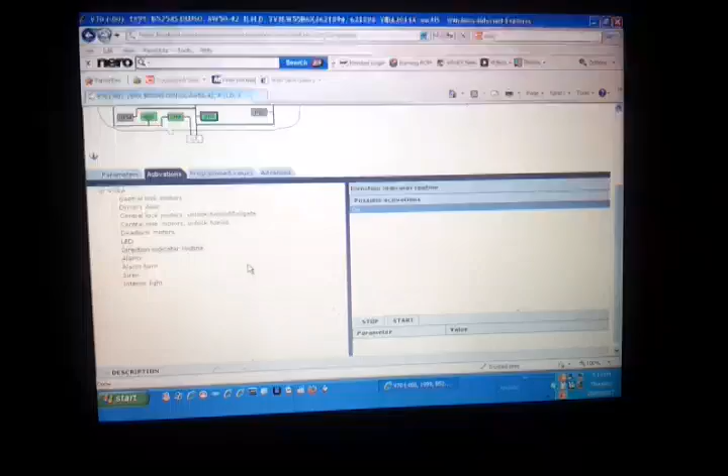Oh, hey guys, it's Mike here, and I'm just looking at the diagnostic system called Vida, which is built for Volvo cars, and I've got it loaded onto my laptop now. I'm looking at some interesting things you can do with VGLA or VGL.

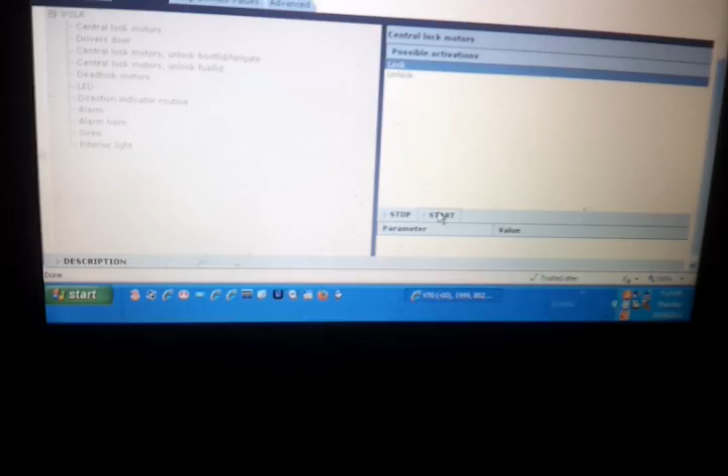Stuff like, if I click on central lock motors and I choose lock, and then I go down and press start, my central lock's just activated. And then if I choose unlock, choose unlock and then start, whatever you do here, you've got to press stop after you do it, so then you can get your display back. See how your display greys out? You can't do anything else until you press stop.

So for example, if I wanted to check my central locking motor, or just my driver's door motor, I press driver's door, then I highlight lock, and then I press start. It's supposed to have locked. Maybe it's already locked, I'll just check. Yeah, not too sure about that. It didn't really work.

Now this is an interesting one, the LED that's up on the dash. I've never seen it light up on this car, but watch now. And there she blows. Because I asked it to blow.

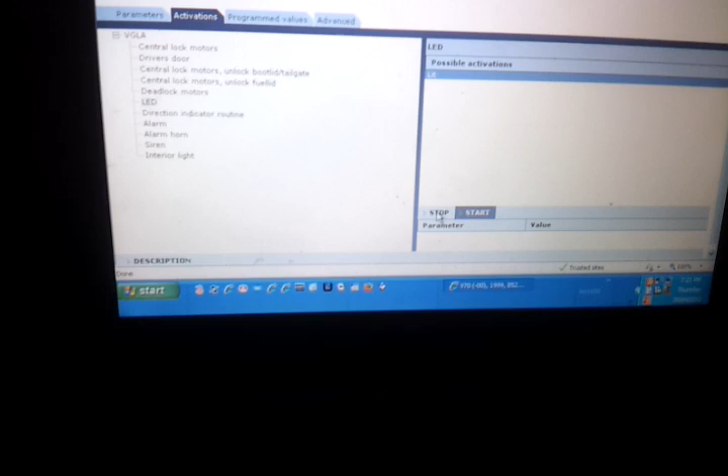One of the things I'm not sure about is whether my car actually has an alarm system. I have no idea. I wasn't given any remotes with the car. I'm kind of guessing that this car was supplied with a factory alarm. I don't know.

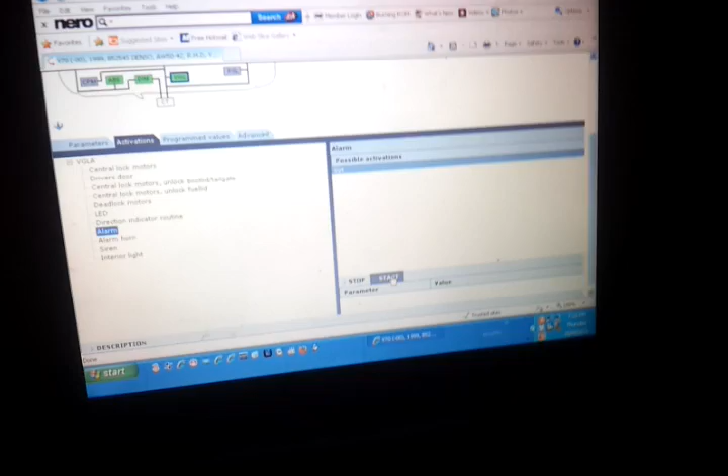I'm doing the direction indicator routine now. Okay, so I've just pressed start and my indicators are on, like it's going through an alarm activation routine. I press stop and they turn off. Now I've pressed alarm, possible activation is set, but all these tests oddly don't seem to work unless the ignition's on.

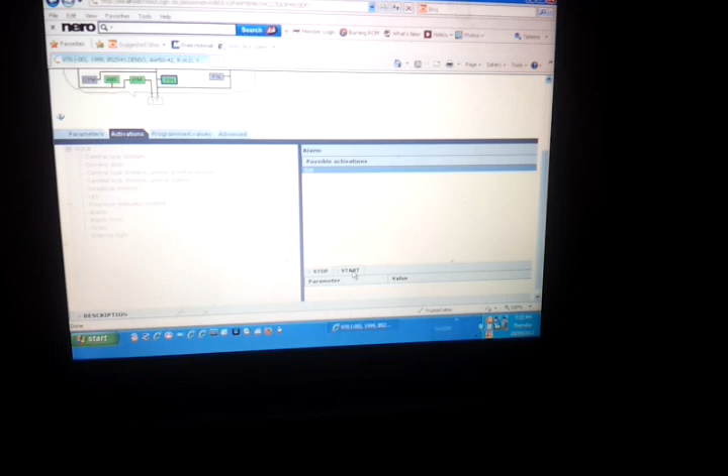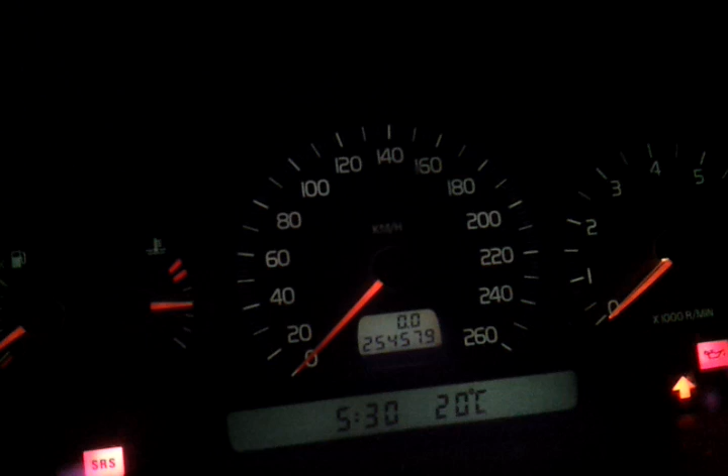I mean, one of the ways I could tell is if the alarm was on and it had an immobilizer, I shouldn't be able to start the car. That starts fine. Oh, hello. Hang on. Aha!

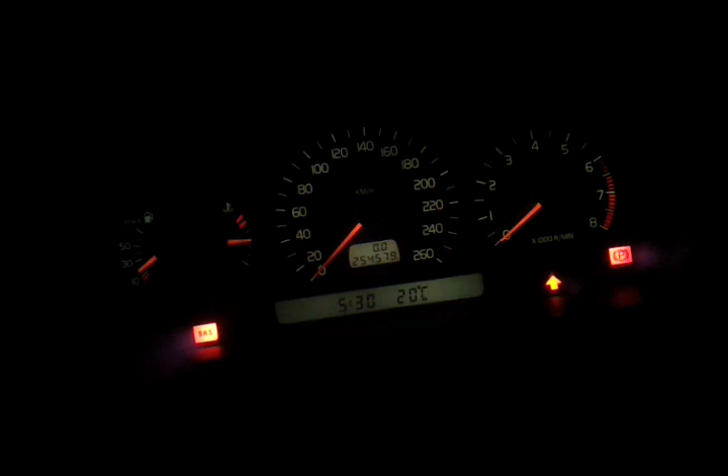Well, I just found something out that's really cool. I just turned it off. And I've still got... Oh geez, what have I done? I think I've activated... Okay. Well, I did something there. I activated some sort of ignition killing immobilized state. Oh man.

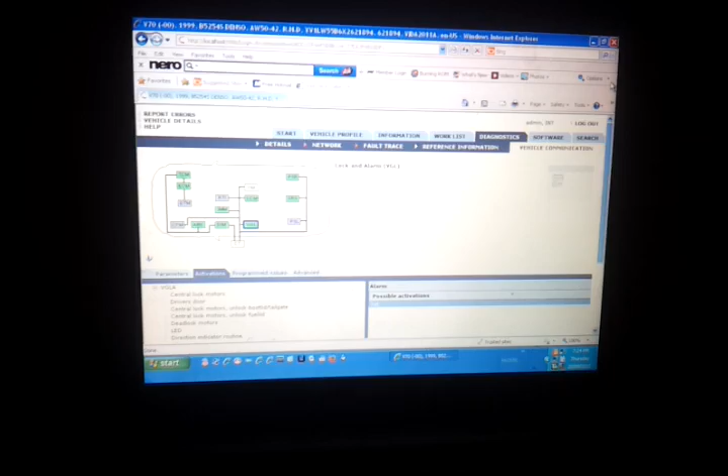Yeah. Well, this has been really cool. Next up, I'm looking at so this is a 99 model with a 4-speed. I'm looking at the TCM and just looking at parameters.

Okay, so I can have a look and see what position the PNP thinks the lever is in. Now this is great for if you fit a new PNP switch and you're calibrating it. Your value is P and the lever's in P. I can't show you that because my console bulb is blown, so that's something I have to do. Just going to remove that from the list.

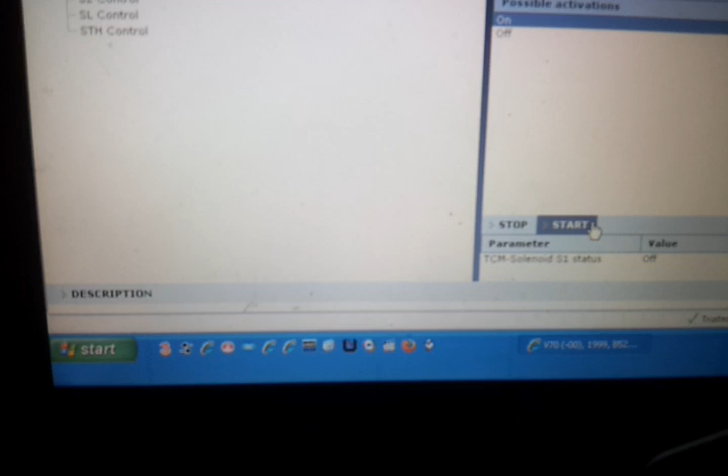And the other thing which I found was really cool, under Activations tab, is you can actually turn on your solenoids. I'm kind of assuming that I'm going to have the ignition off for this. I'm not going to be operating any solenoids with the engine running. I can't hear anything.

Let's see. Okay, it says TCM solenoid 1 status off. Possible activation on. Start. No. Okay, so we'll do this with the ignition on.

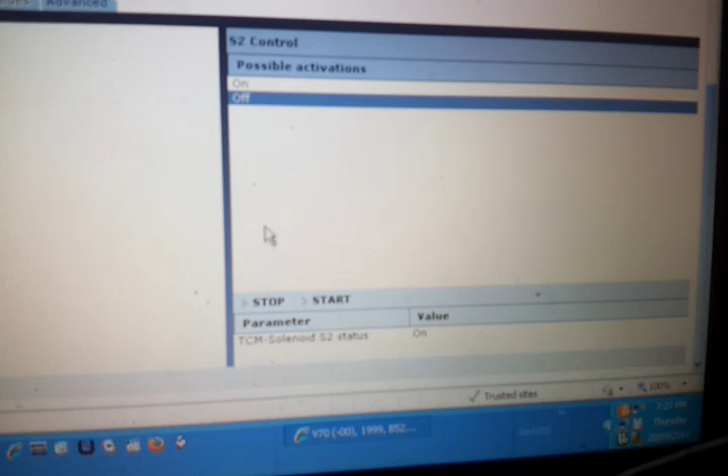Okay. Well, it's changing its state from on to off. We'll do the same with S2. Status is now on. So let's turn it up. Oh, sorry. Let's activate it to off. Okay. And let's see if the status changes. Yeah, it sure does.

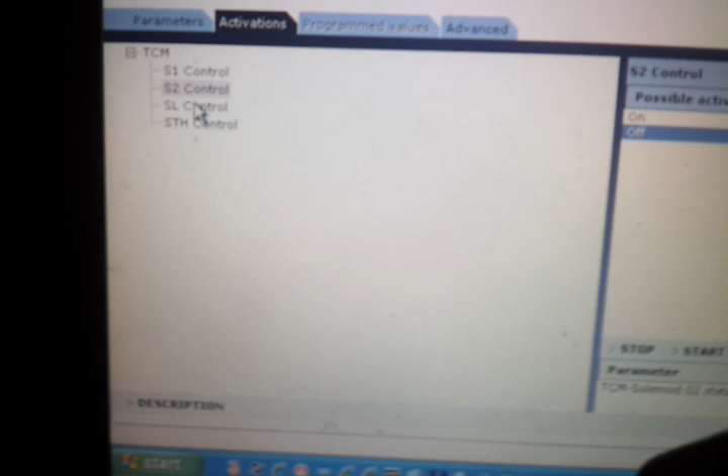So this is a way for people to test their solenoids if they're having gearbox problems with Vida. Now this is the lock-up solenoid control. Current status is off.

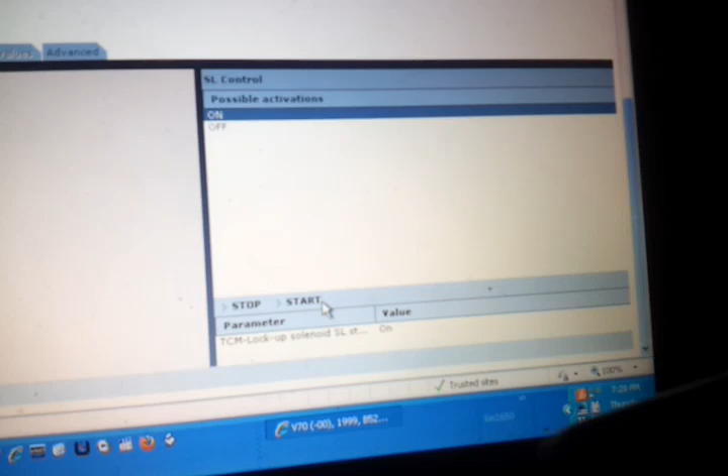Now, just because it changes to an on state, it doesn't mean the solenoid's working. I think what it's telling you is that the voltage is being applied. It doesn't know what position the solenoid is in because the solenoid doesn't have position sensors.

Okay, and there's some other stuff here in the Advanced tab. I wanted to just go through it.

Okay, I didn't know this. The 4 speeds, according to this - I've programmed in AW50-42 - has got a resetting transmission oil replacement counter. It's asking me which engine number I have. Do I have any of those? Well, that's a no, I don't have a B5202. They're all 10-valve versions, so I don't have those.

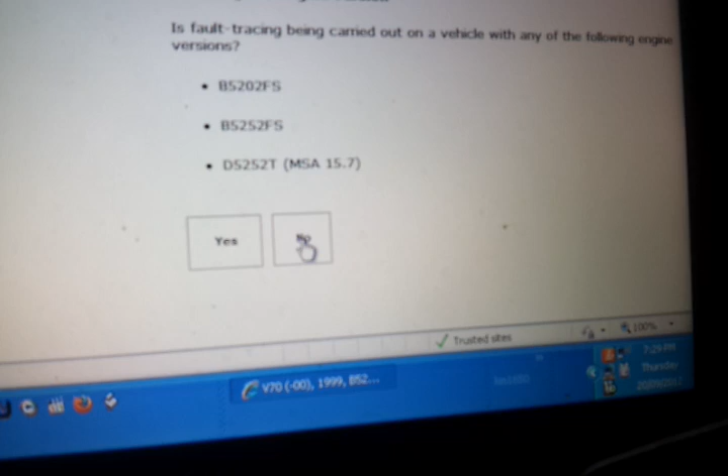And then it's telling me to turn my ignition on, connect my VCT 2000, which this is not, and I'm going to press continue because I have just put new fluid in recently.

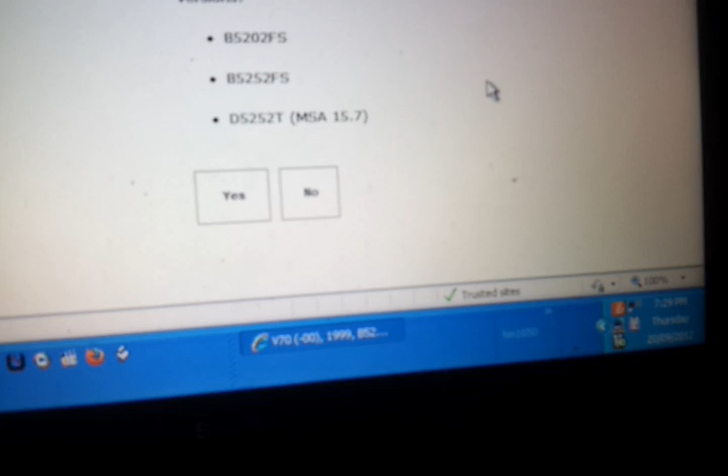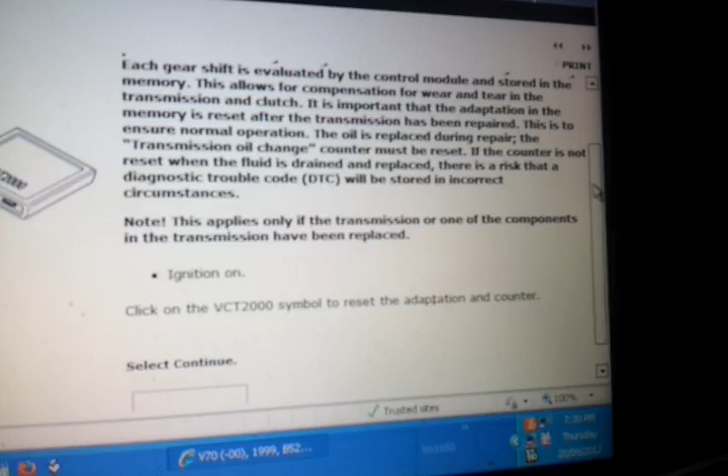And get this too, we've got a resetting the adaptation. I didn't know you could do this on a 4-speed. Apparently with the 4 speeds you do it by just disconnecting one battery terminal and touching them together, and you basically get yourself a reset.

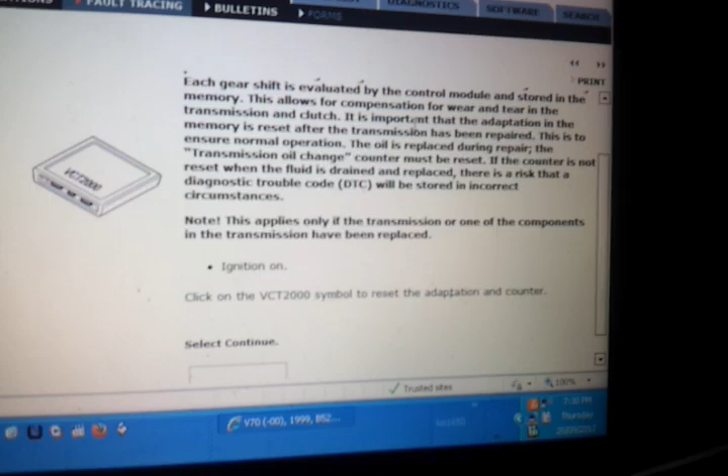But it says here each gear shift is evaluated by the control module and stored in the memory. This allows for compensation for wear and tear in the transmission and clutch. It is important that the adaptation in the memory is reset after the transmission has been repaired, to ensure normal operation.

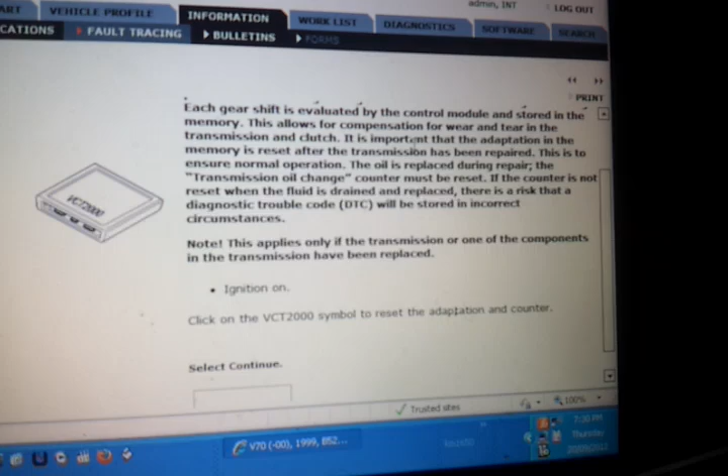The oil is replaced during repair, the transmission oil change counter must be reset. If the counter is not reset when the fluid is drained and replaced, there is a risk that a DTC will be stored in incorrect circumstances. Note this applies only if the transmission or one of the components in the transmission have been replaced.

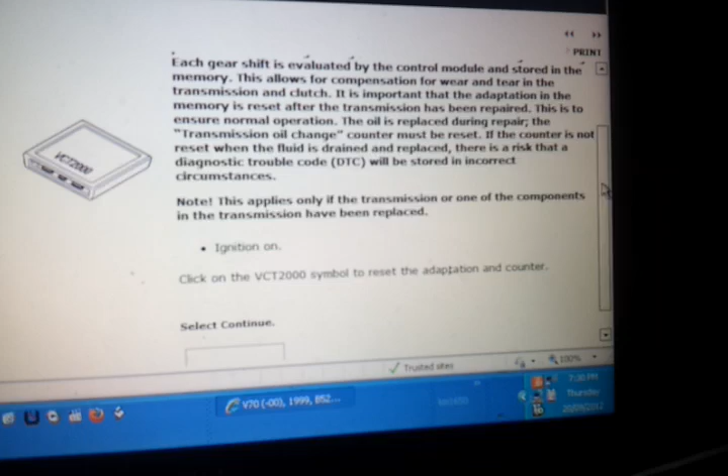Well, no, I haven't replaced anything in my transmission, so I'm not going to do that. But I have changed the oil, so I've done the oil.

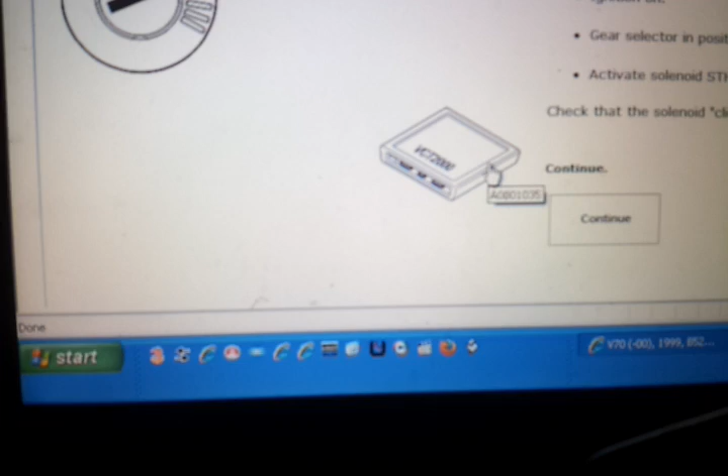Now there's another one here called activating line pressure solenoid. Why I would do that, I don't know. I don't know what that means, and it's taking me to another window. But yeah, as you can see, there's some really amazing stuff here.

If I go through fault trace, for example, I can look at the state of my car back on the 9th of the 6th, 2012. This is when we had a bunch of error codes. I don't know which of those is still with us.

I believe the only one with us is the PSR 424, which is about number 7 down. That one is still with us because I put an 850 power seat module in, and it seems to think that it's not the right one. Well, that's fair enough, it isn't, and it's reporting correctly.

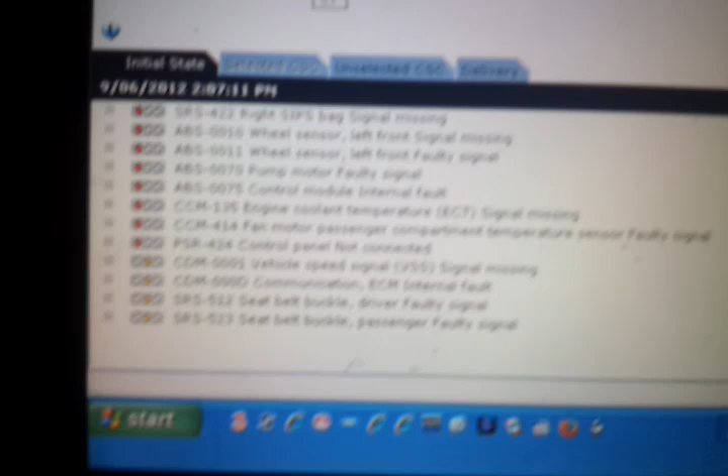Something about the fan motor passenger compartment temperature sensor signal faulty - yeah, I don't know about that. That seems to be okay now because it's not in the delivery tab.

We did have ABS problems with this one, I think, if I'm not mistaken. Yeah, I got a unit from Matty Moo, and we put it in this car, and it's sorted out the ABS front left faulty signal and front left signal missing.

ABS pump motor faulty signal, we got rid of the control module internal fault signal - they're all gone. SRS, we sorted that out.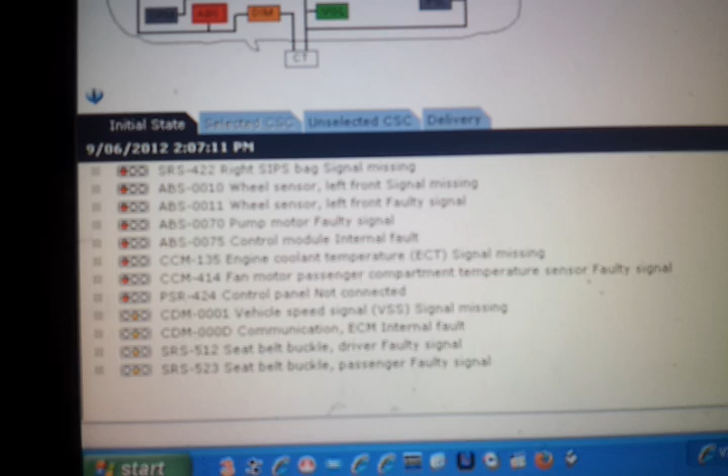By fitting a resistor across the connector going to the seat. We were not using a 99 model seat, we're using a 96 model seat, so I had to deal with the connector that went to the airbag, and I put a couple of resistors equaling about 3 ohms across it.

What else do we have? These belt buckle ones I think are gone now. I don't know what that means, maybe they had some corroded connections or something. They seem to be all gone.

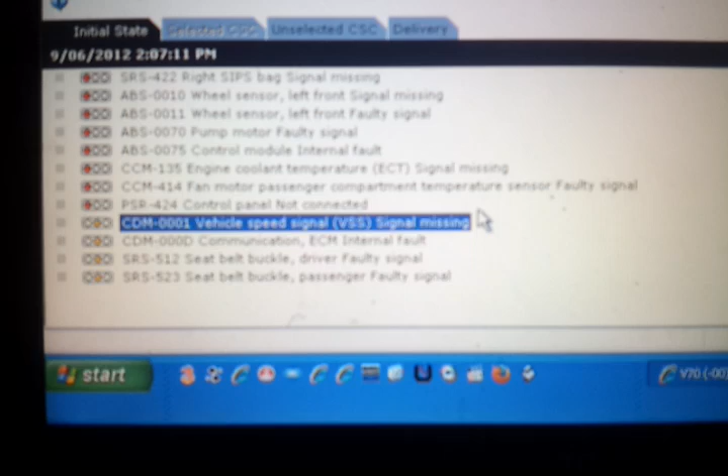Vehicle speed sensor, we had this - this is a 96 gearbox fitted to a 99 car. What I failed to do is put the 99 speed sensor back into my 96 gearbox. They're a different sensor, and it was looking for the particular impedance of, or particular signal that a 99 signal gives. So that's all sorted out.

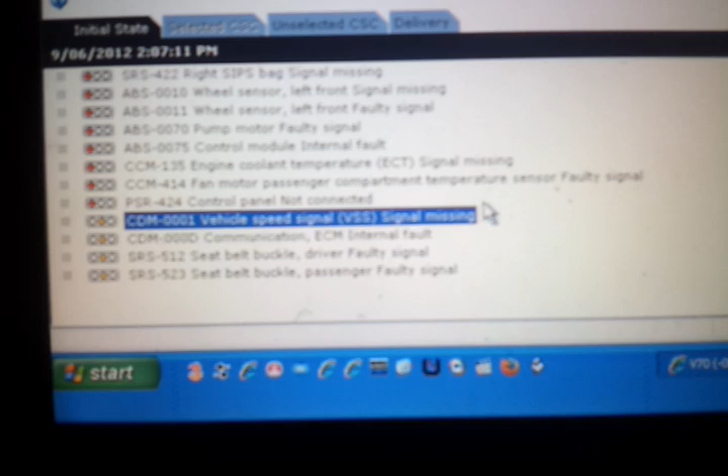ECM, yeah, that's gone, don't have that anymore. So if we look at delivery, this tells us the current state of the car.

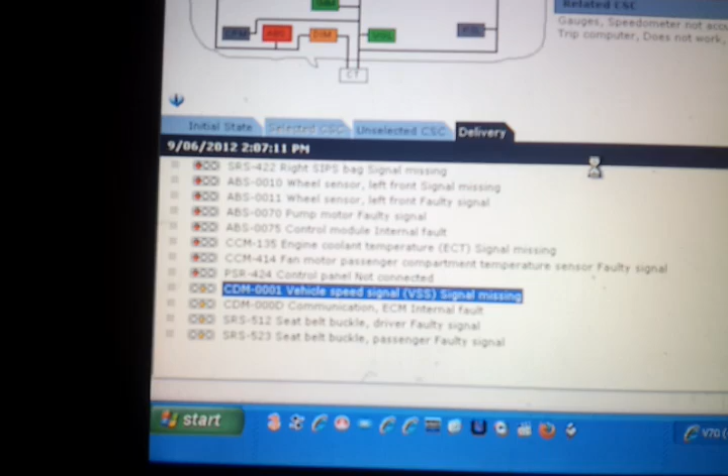Vida's a bit slow. I haven't got the recommended 2 gig on my laptop, I've got 1.5 gig of RAM. It is, I think, a dual core, like a 1.4 or something. No, it's a 1.8.

Okay, we've got an immobilizer communication, faulty communication. I've never had that before. ECM 720A. Possibly when I just did that little trick with the alarm, putting it in alarm mode. I don't know if that's really a problem.

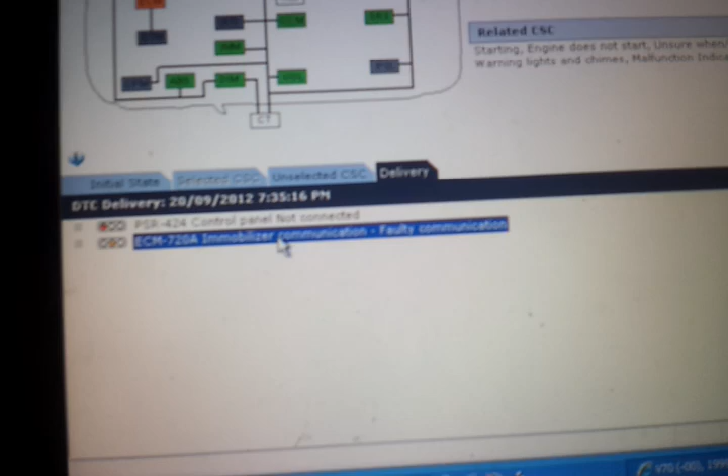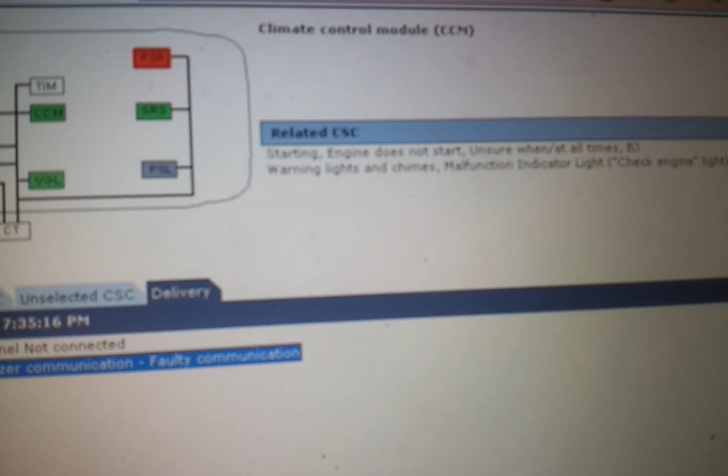So it's there, it starts, and it explains to me what actually happened. Engine does not start, when you've got an immobilizer problem. And that's true, the engine didn't start. Problems with the power, it doesn't explain the power seat control panel not connected, doesn't really tell me anything about that. It's looking for a power seat module because I have the power seat fuse in, and it's looking for the correct power seat fuse.

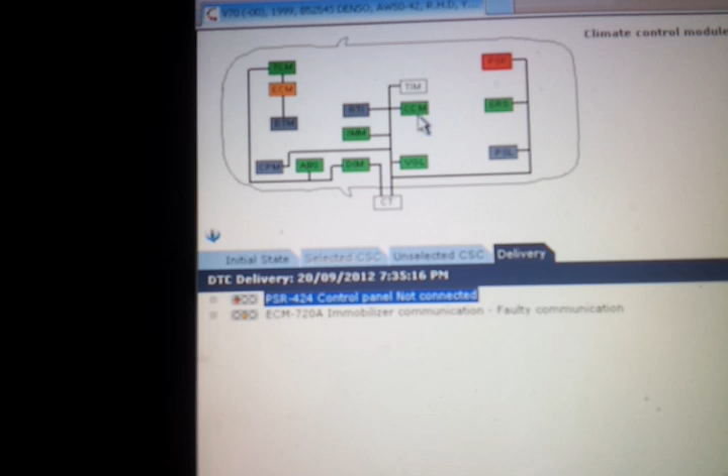Climate control module's interesting.

Yeah, I'm coming in soon. Yeah, I know you do. I'm just doing a video, and I won't be long.

Combustion. Okay, no, we haven't got a CPM combustion preheater module, so we're not going to do that one.

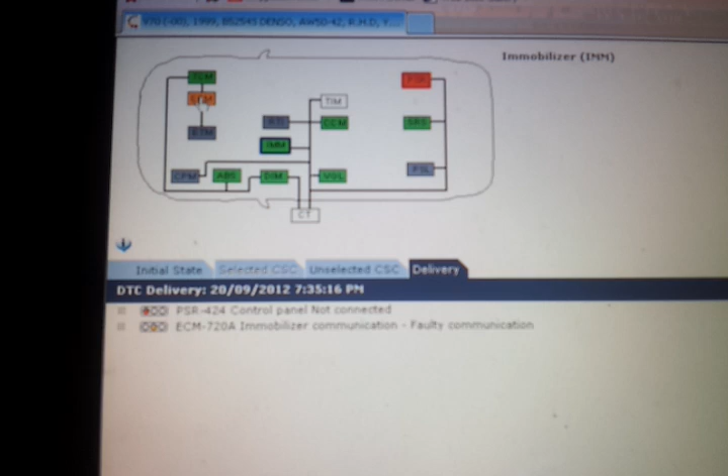IMM, yeah, it's the alarm. Well, look, I'm gonna cut it short. The ECM's an interesting one too. The ECM is communication. I think, yeah, here we go. ECM.

Oh, okay, it's raining. I better shut the windows. It's been a warm day, and it's really uncomfortable here in Melbourne because we had a warm, sticky day and now it's raining, and I've got mosquitoes here in this car with me that have just started to bite my back. So I think I will go inside.

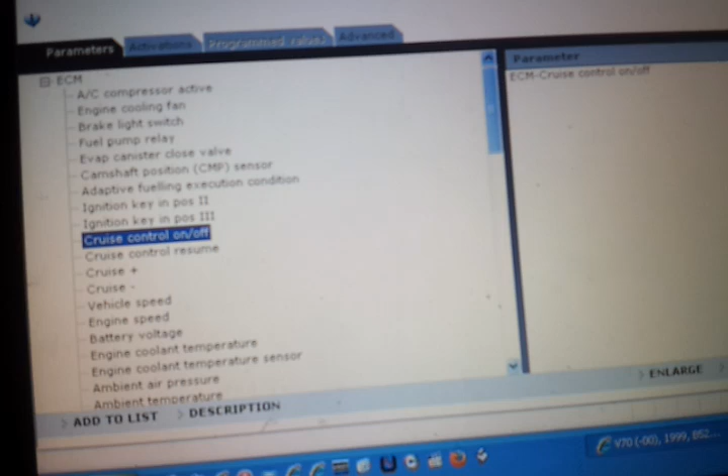On the ECM, this is really cool. We've got... wow, this is really interesting. It says here I haven't got cruise control fitted to this car, but I have got a cruise control switch fitted, and just by flicking the switch on and off, it's telling me what state the switch is in. This system's really smart.

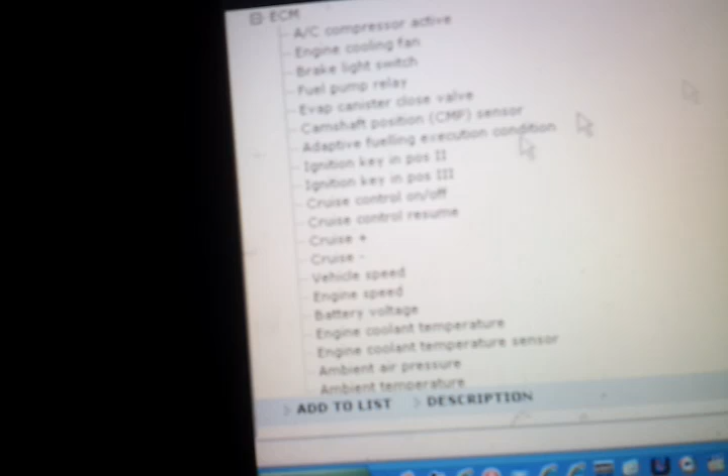Cruise control resume. What state is that? That's off. Yeah, I'm just flicking it up to resume. So that's testing my switch.

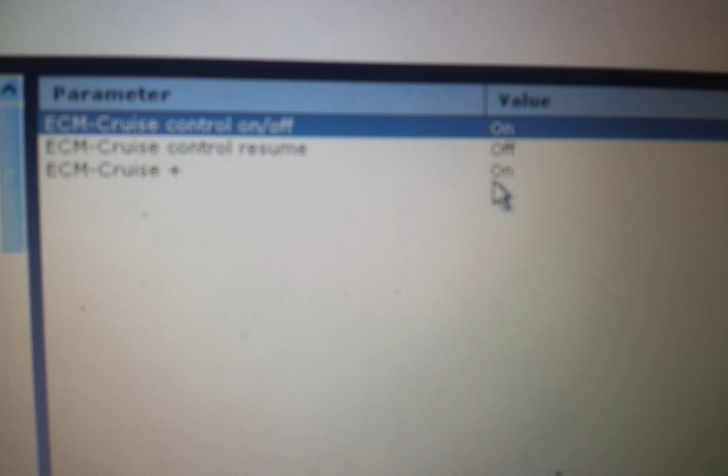Cruise Plus, so this is checking my Cruise Plus contact. I'm just going to flick it on, get that mouse out of the way. On. Yep, so now the contact's okay. I'm going to check my cruise minus. Yep, that was on. Yeah, that's working, so I know that all the contacts in my switch are fine.

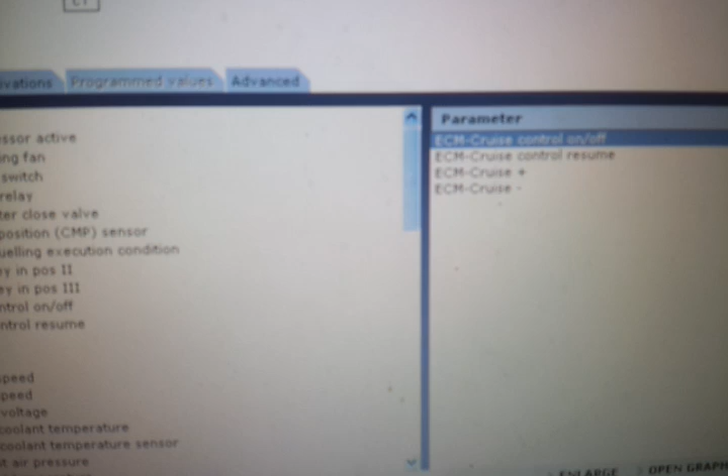You know, these systems are just amazing. You couldn't do this with an OBD2, just a diagnostic unit. Without Vida, you're pretty much, you know, you've got to take items out. Like if the cruise control switch was suspect, you'd have to take it out, test it, see if it's okay, run some contact tests with a meter. I mean, look at this, it's just unbelievable. And the beauty of this...

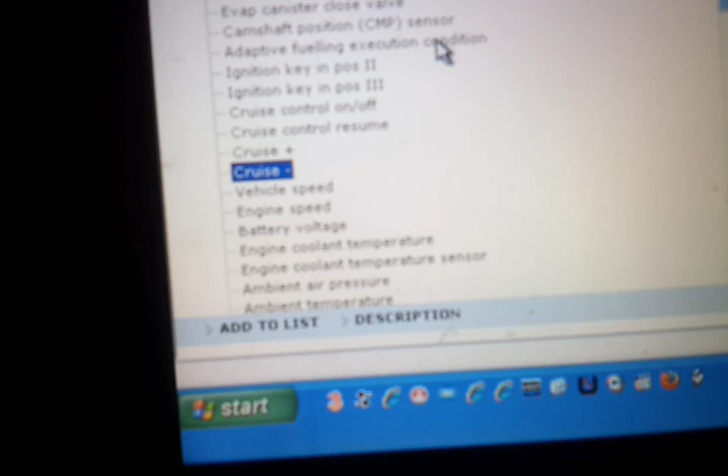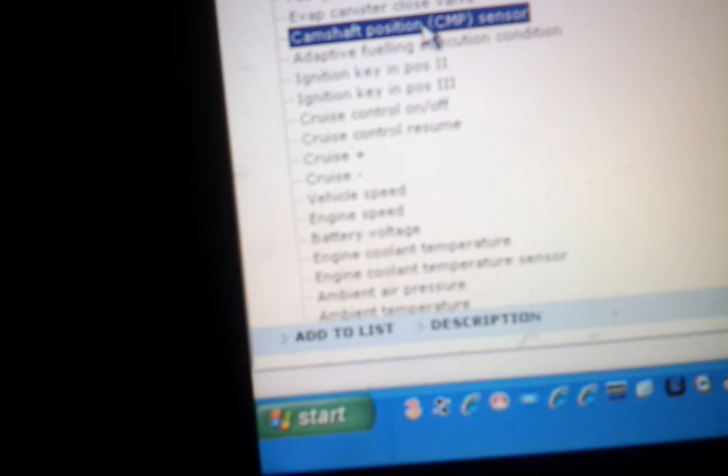This is adaptive fueling execution condition. What? Now, what's the state of that? Not executed. What on earth is that? Camshaft position sensor. What position is that in? High.

If I turn the motor over slightly, it's still high. Still high. Still high.

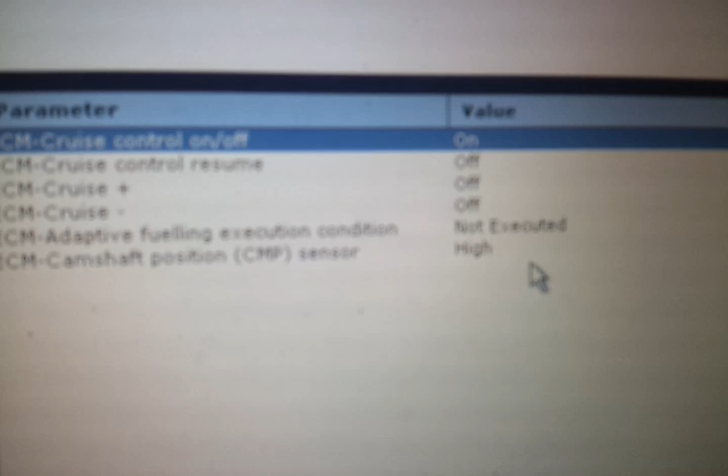Let's see if we can get it into a low state, which means the little flag is... oh, hang on. This is a 99, so it doesn't use... gee, these are a bit different. Yeah, these are a little bit different. This is not the traditional camshaft sensor. This is a Denso system, so it's got a very different camshaft sensor. We're not going to get it to go into a low state, I think.

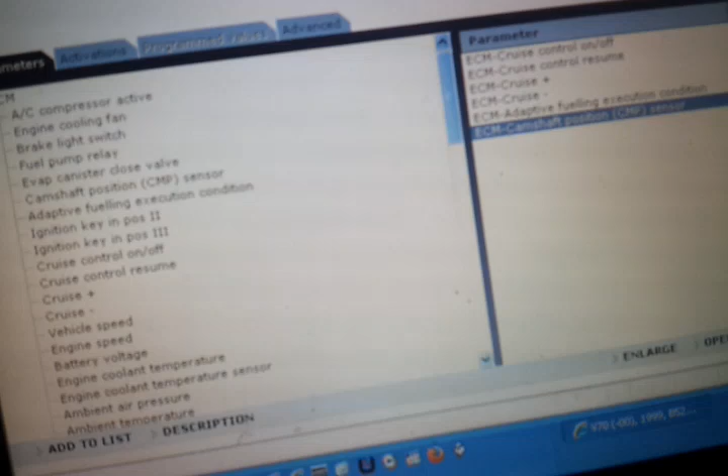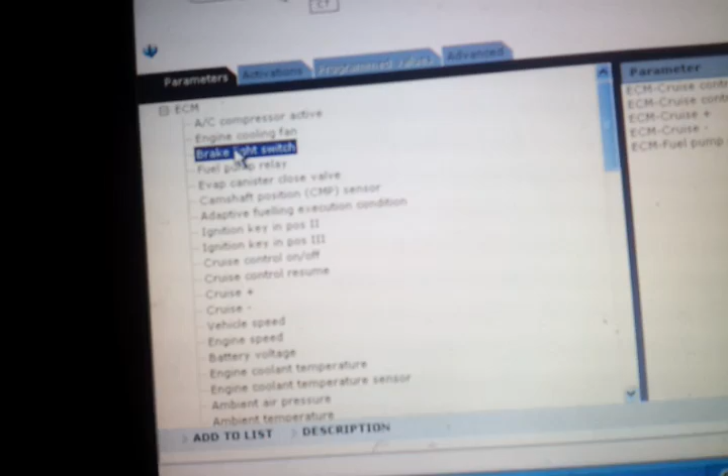Just going to remove some of this stuff. Oh man, these mozzies have really got me. Fuel pump relay. Okay, what does that mean? Off. Okay, so I'll toggle the ignition. Probably was on, but they turn off after 1 second, it probably wasn't quick enough to catch it. I can test my brake light switch. Yeah, that's a good one.

Just pressing my brake pedal now. Brake light switch is on. Brake light switch is off.

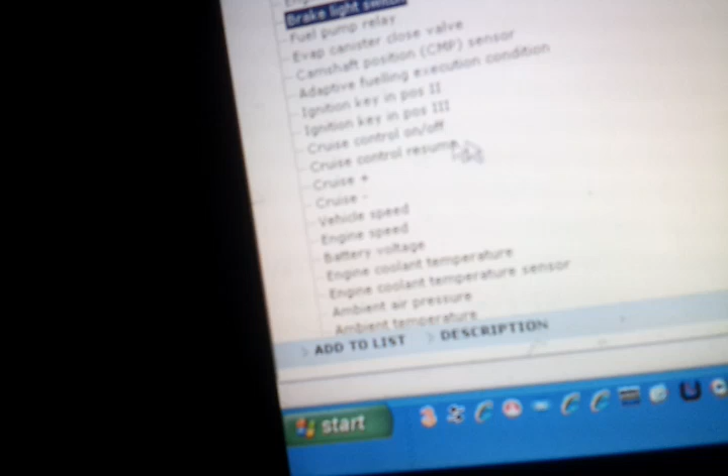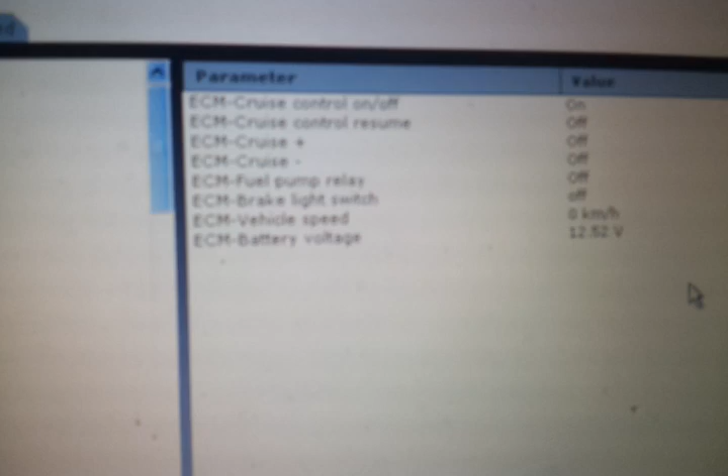We can put all sorts of things in, like vehicle speed and battery voltage. This is a good one. You want to know what your battery voltage is. We don't need a multimeter when we've got battery voltage. Let me just have a look at that. Yeah, 12.5, it's looking okay.

All sorts of stuff here. Yeah, brake pedal position, accelerator, PWM. Now this is useful for if we're trying to fault find our ETM, we're getting all sorts of codes. Now it says 8%, my foot's not on it. Now it is. It's about two-thirds now. It should be reading... yep, 53. Flat to the floor.

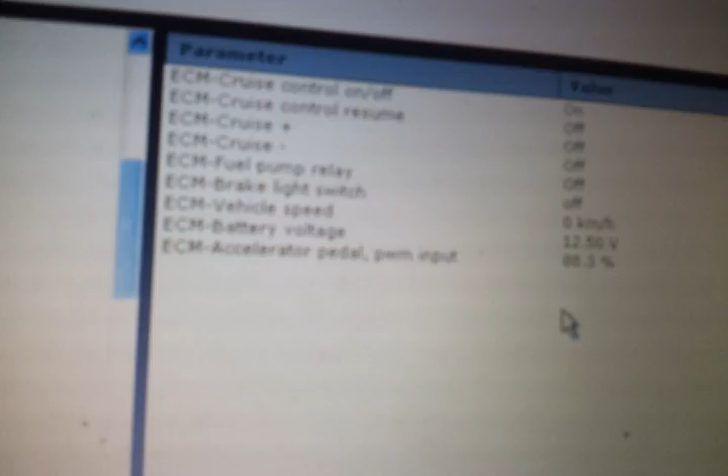And it should come up with, I don't know, 100%? 87. Hey, I want this to go 100%. Where's my 100% throttle? I've only got 88. Does that mean it's only going to go 88% as quick as it can? Oh well.

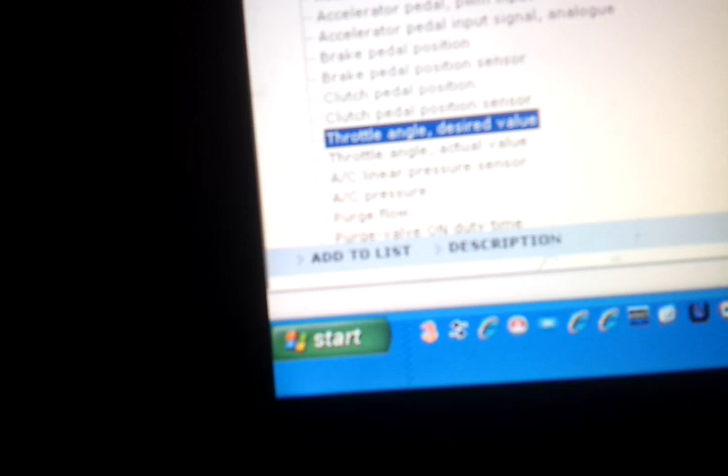Throttle angle, desired value. This is interesting. I'm going to have a look at this as well. Now this is more to do with our ETM. I've got ignition on. 3.43%. 34%, interesting. Okay, throttle angle desired value, and you compare that to the actual value.

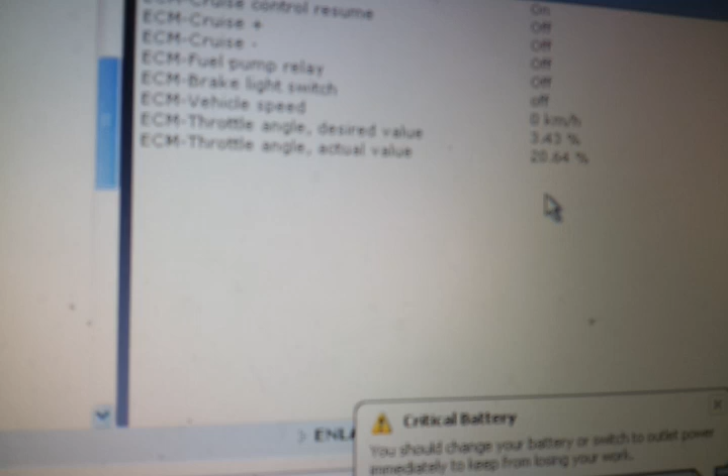Now this is interesting. It should be, wow. Shouldn't desired and actual be equal? I'm just going to press it. Okay, I know why. Because these ETMs actually disengage. It takes about 12 seconds for this ETM to reset itself.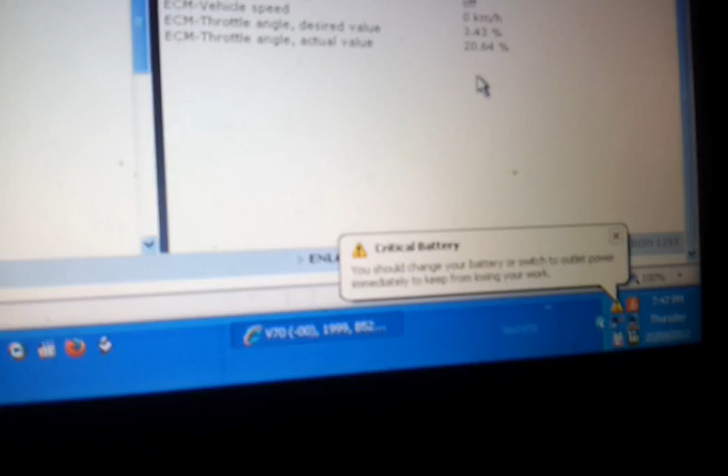No, it hasn't. Oh. I'm getting a problem with my power here. I hope I don't lose this. Anyway, you don't want to... yeah, I'm not going to bother about that.

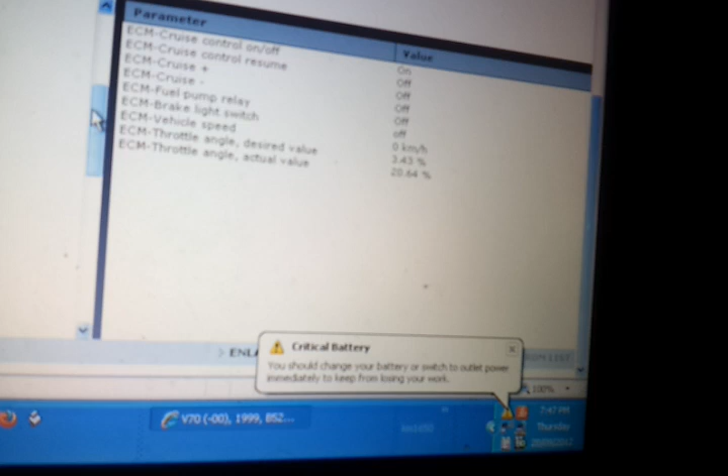Absolute, yeah okay, so we can look at our mass airflow sensor while the engine's running. That's something I would like to have a look at. I know nothing about mass airflow sensors. I know that when you're idling, something about it being around the 5 mark. So in, what's G per second? Well let's have a look. Zero at the moment.

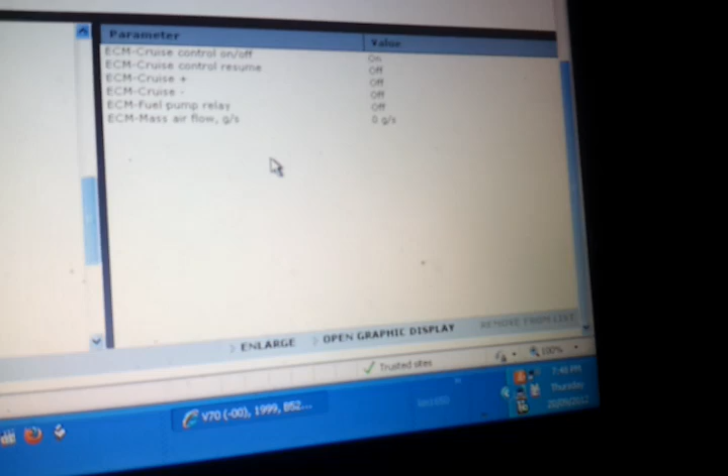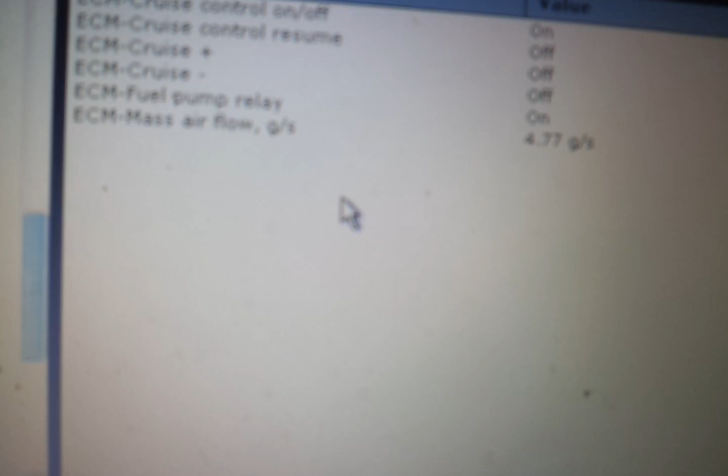Let's have a look. Oh, come on. Okay, yep, okay so we got about 4.77. Apparently that's ideal for idling. Look at the revs up at about 2,500, we're reading 10.98. I have no idea if that's correct.

Misfire counter 1. We did have a misfire on this car, on cylinder 1. But I think it's all been reset with the battery being disconnected and made flat.

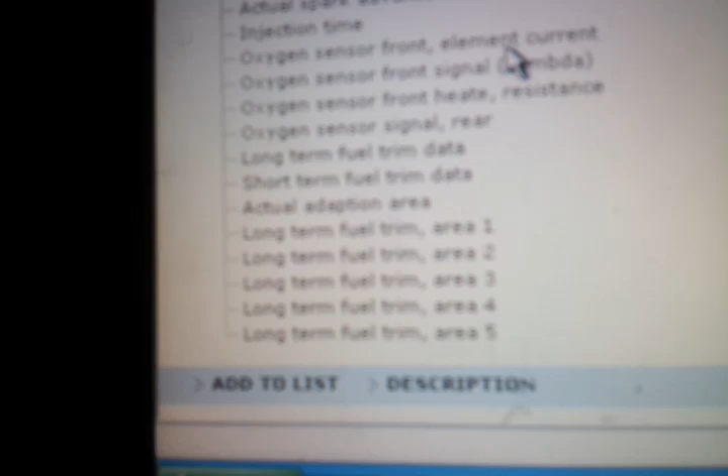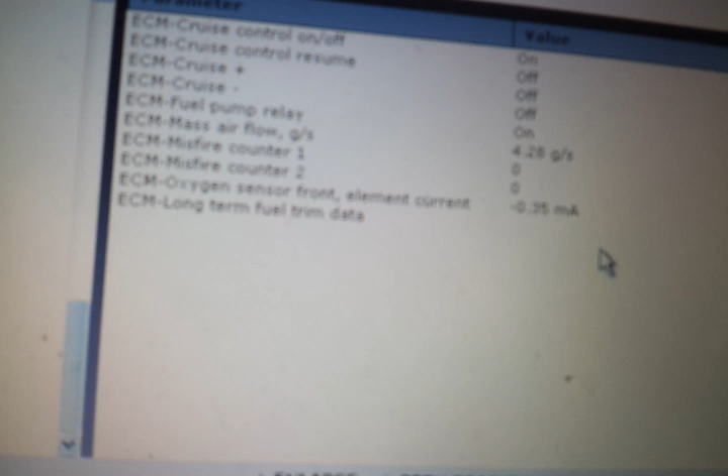Injection time, oxygen sensor front, element current. Oh yeah, this is really cool. Love it? Don't you love it? Long-term fuel trim data. This is what you see the pros working on when they look at cars and they look at the long-term fuel trim data. I have no idea what that means.

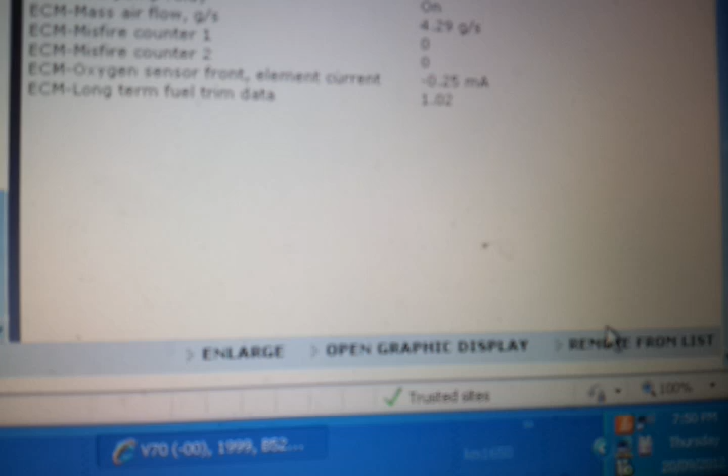Okay, so we're going to get rid of these cruise things because this has really caught my eye. Now, long-term fuel trim data, area 1. Okay, just looking at that, in area 1. Told you to stay away from area 1, it's off limits.

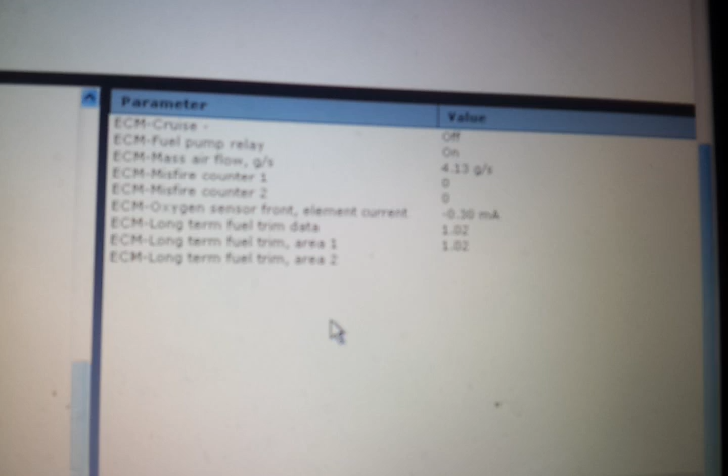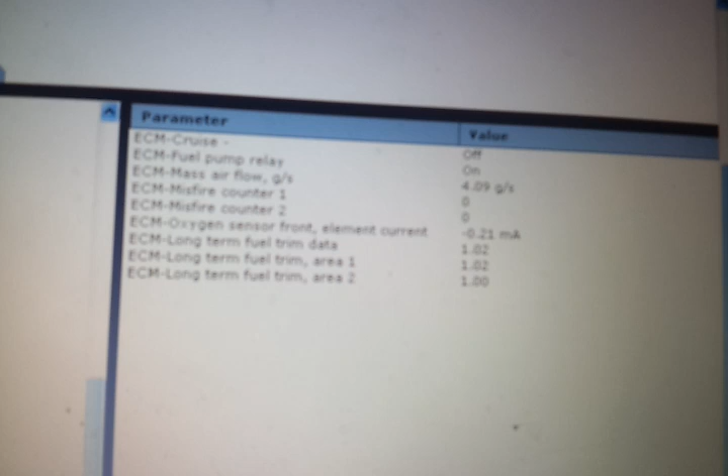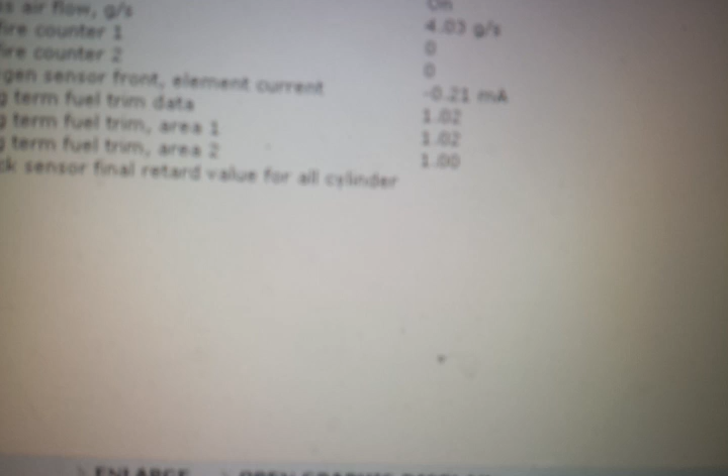I'm kind of crazy, but you can go into area 2, that's the same, so you know, well yeah, knock sensor. Okay, I want to look at this because the knock sensor on the 850 block, which is what's installed in my 99, is in a different position. It's called a knock sensor final retard value for all cylinders. Ooh, I don't know if that's good.

Well, don't know what that means. Yeah.

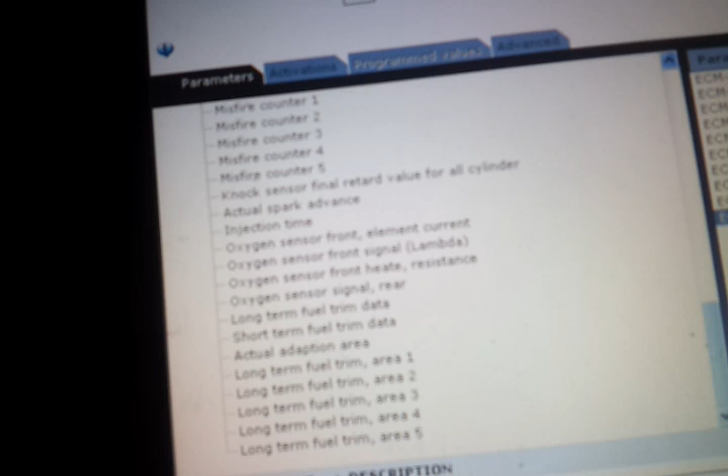So, it's a really powerful system, and it's able to give you a lot of diagnostic information at your fingertips, and that's what I love about the latest in computer-controlled engine management systems and computer-controlled diagnostic systems. They're just really, really awesome.

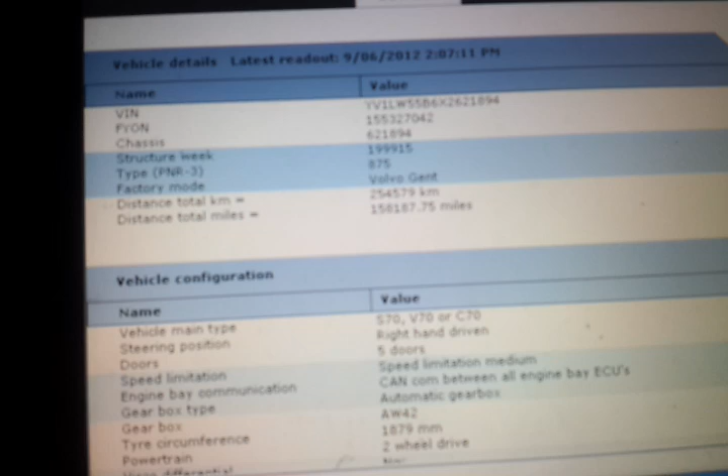It sure has brought me a little closer to understanding Vida. There's a few things in there I'd never looked into. I mean, you could be there, it's a bit like the internet, you know. You could be there all night, and YouTube, you could be there all night clicking away, and you still won't even see half of it.